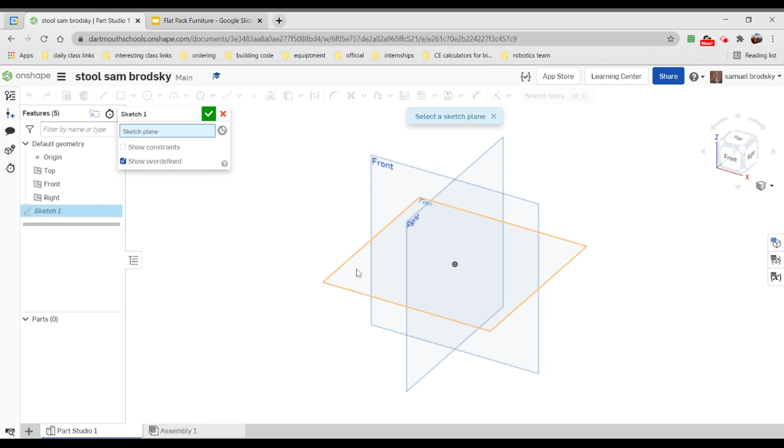Obviously, we'll always begin with a sketch. I'm going to do it on the top plane because I feel like it. I'll look at the top plane.

Now's the point where we need some dimensions, and we're going to have to switch over to look at our sketch to figure out exactly how we're going to make it. So maybe I'll start with this top piece, which is a 12-inch circle, and I'll later cut some 8-inch long slots into it to fit the stool legs. I could also have started with the stool legs, it doesn't really matter.

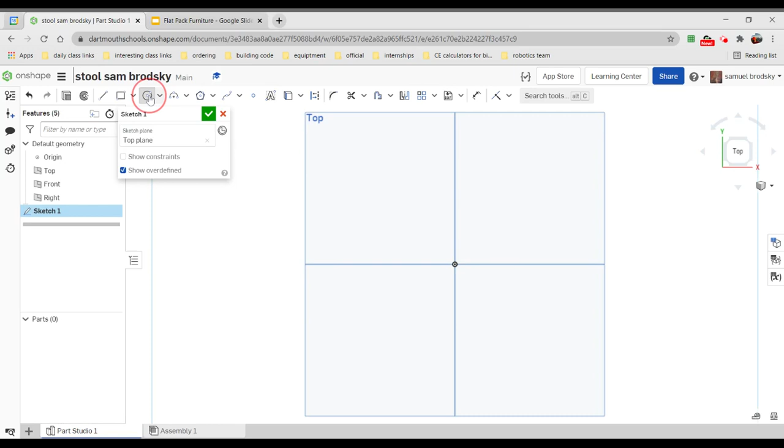I'll put a dimension in there. It's too big for my screen, so I have to zoom back in, or I can just click this and it will automatically zoom it. And that's my first sketch.

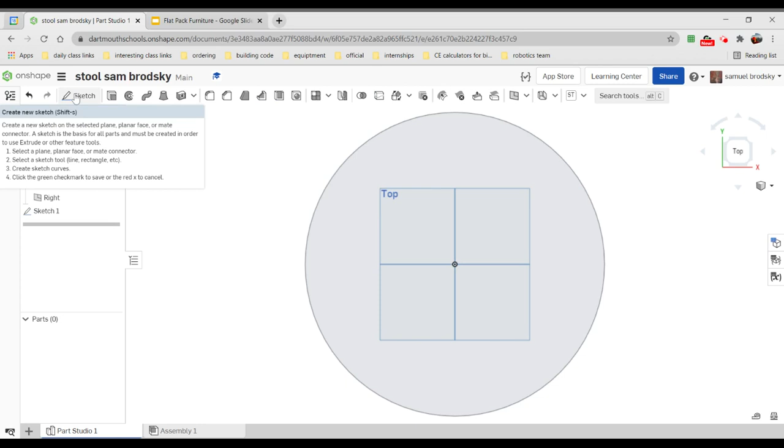You know what? I'm going to put my little cross-hatching in that sketch.

So I'm making this 3/4 of an inch wide, and I'm making it 8 inches long. I want to center it on here.

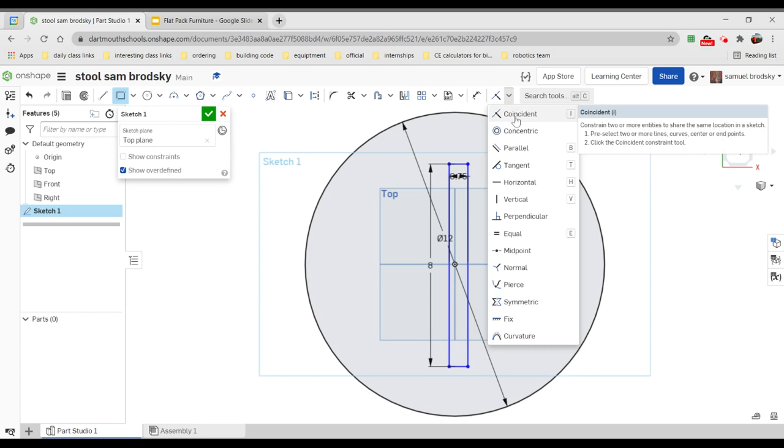So I might be able to do that with a constraint. But maybe not. So I'm going to do it with a dimension, because that's just as easy.

So that is half of 0.75. So I could actually do 0.75 over 2. Or I could go with 0.375.

And then I could dimension from here to here. Half of 8 is 4. Another one of those, going this way.

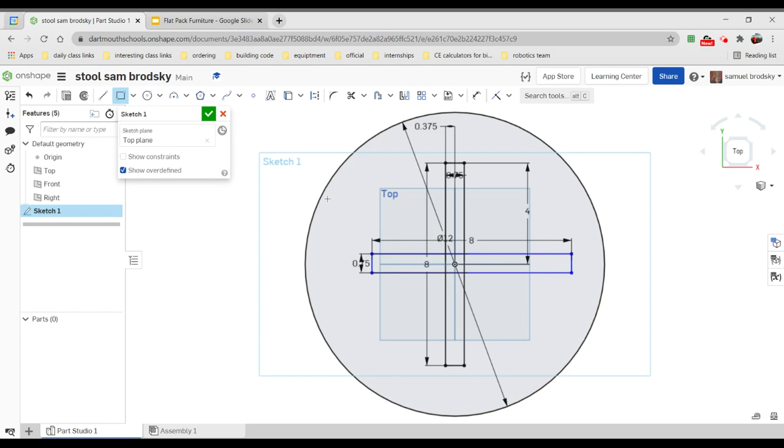I could have also used the linear pattern here, or sorry, circular pattern here, but I didn't, so no biggie. I don't think it would have been much faster with just 2 instances of the item.

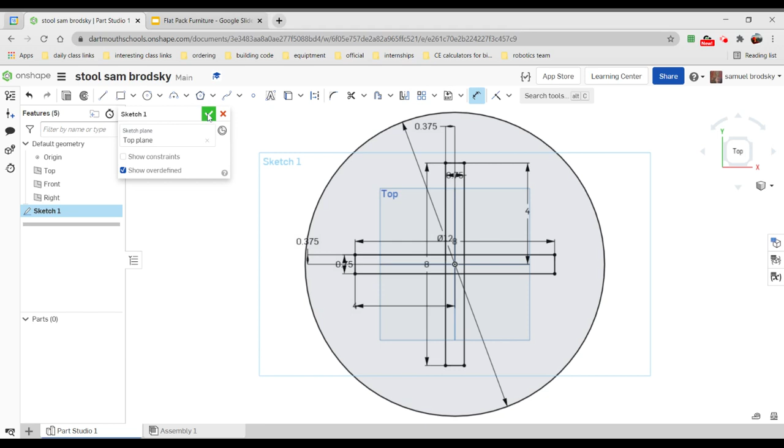Alright, and now that sketch is finished. I'm going to extrude everything.

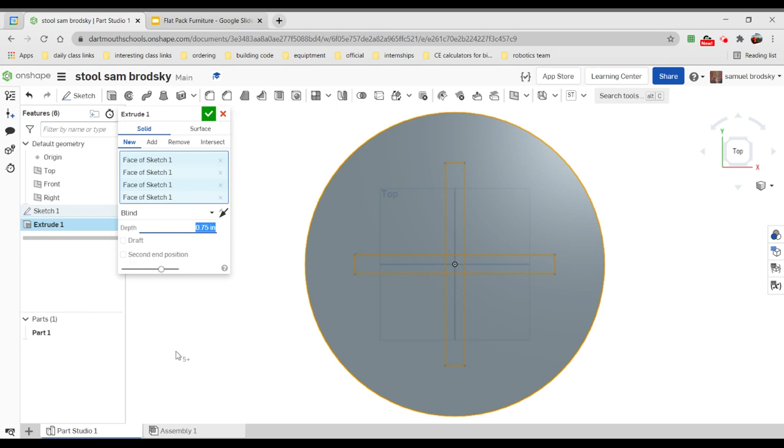To a distance of 0.75, because that's my wood. And now I have the top of my stool.

Now in order to cut that out, I'm going to actually make sketch 1 visible so I can see it again. And then I can use it again to extrude all of these pieces.

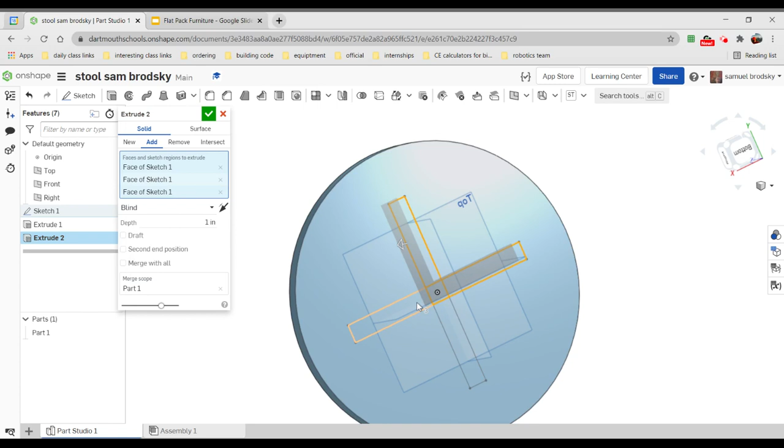Looks like it's going the wrong direction, so I'll change the direction. Oh no, wait, that is the right direction because I want to be on remove. And I'm only going to do 0.5 all the way through.

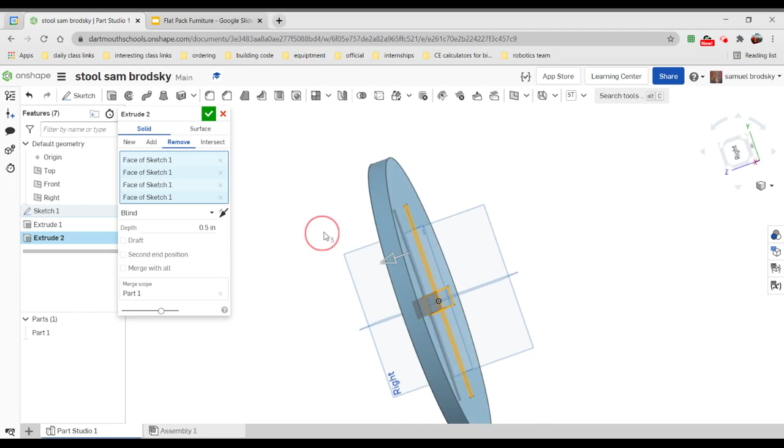So that looks about right. That's what I want. Alright, so there's my cut. And the top of my stool is complete.

Next step is going to be to build the legs. There's a couple different ways I could do that. I could build them in place, or I could build them separately. I'm going to build them separately.

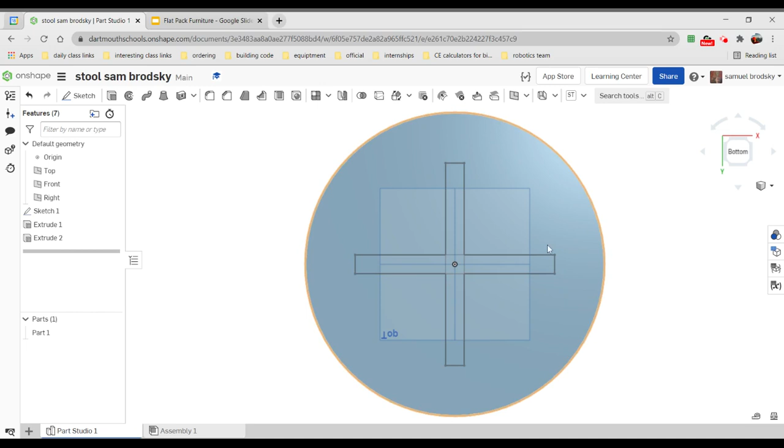So I'm going to start a new sketch on, let me flip this over, put it on the top.

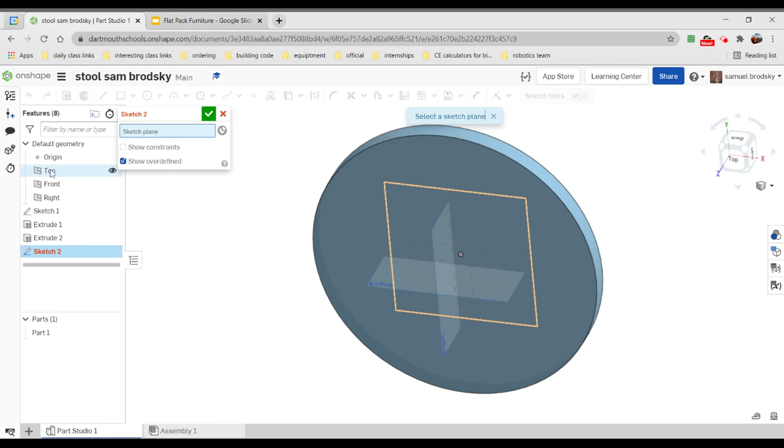So I've got a new sketch in the top plane, and I will drag this over so that I have a little space and zoom out. Again, it doesn't actually matter exactly where I put this because I'm going to assemble it later on.

Now looking back at my sketch, it's going to be 18 inches tall and it's going to be 12 inches wide. And there's a little slot at the top, 1/2 inch tall, 8 inches wide.

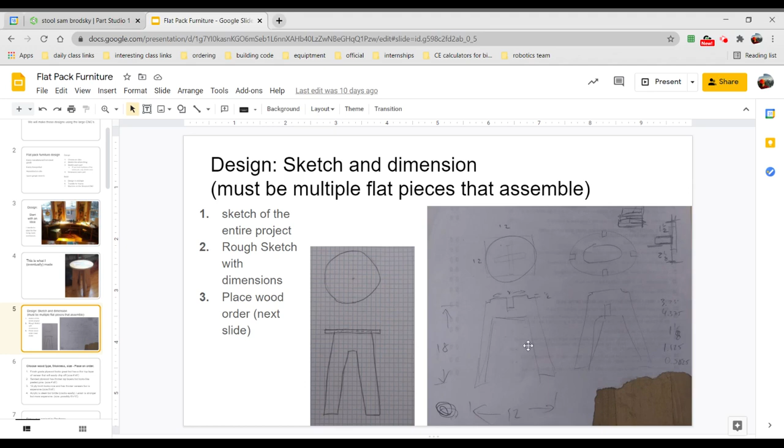I haven't put any dimensions on the internal shape, so I get to make those up as I go. Probably the easiest thing is going to be to start with a rectangle, which is going to be 12 inches wide and it's going to be 18 inches tall.

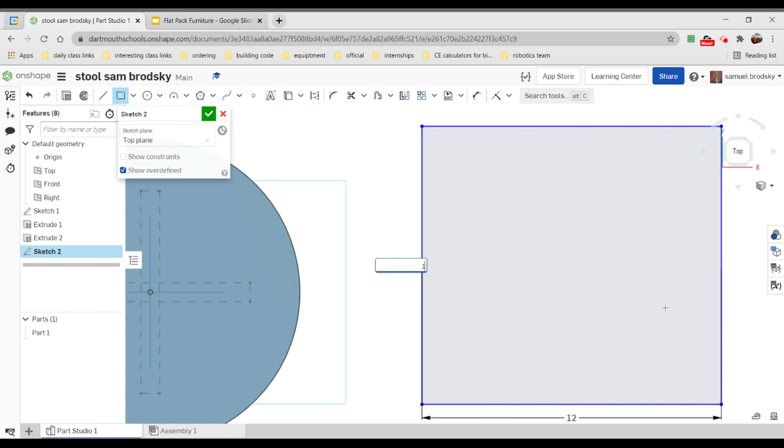I need to zoom out to see that. And now from this, I'm going to make all of the parts that I need to make. So I'm going to make a little slot that fits in the top.

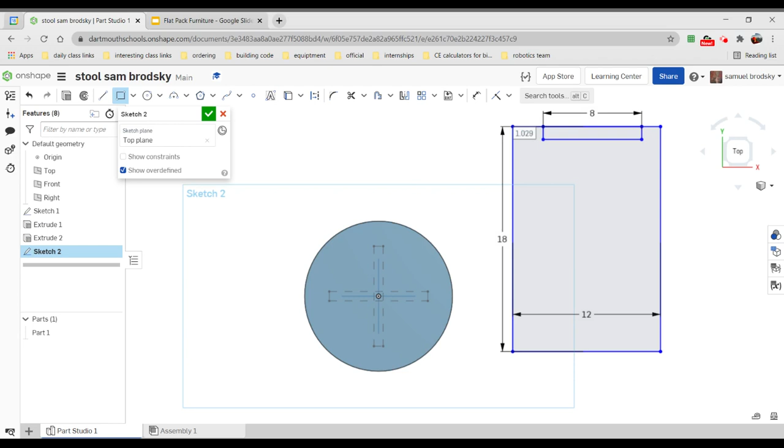And the dimensions of that are, so you can see it, I'll zoom out, 8 inches by 1/2 inch.

I have to make sure that that is centered on the 18 by 12, so I'm going to use a dimension tool here. Go from there to there. And that should be 2 inches.

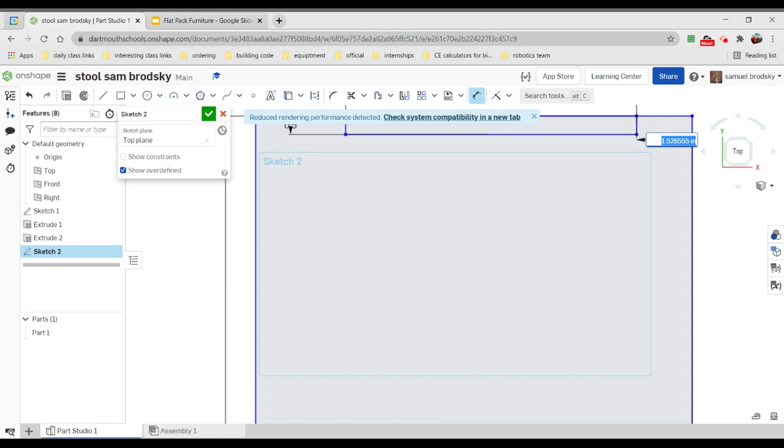I don't know how long I want it. I didn't really say in my thing, but maybe 1 inch long.

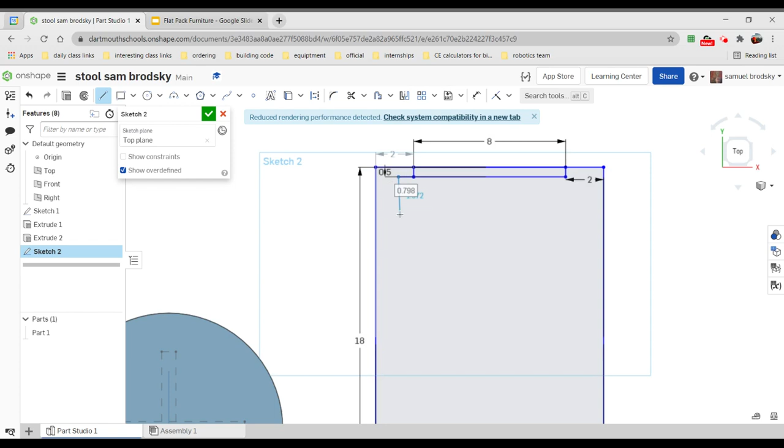And then I'll come down to this corner right here. And then I'm going to do the same on the other side.

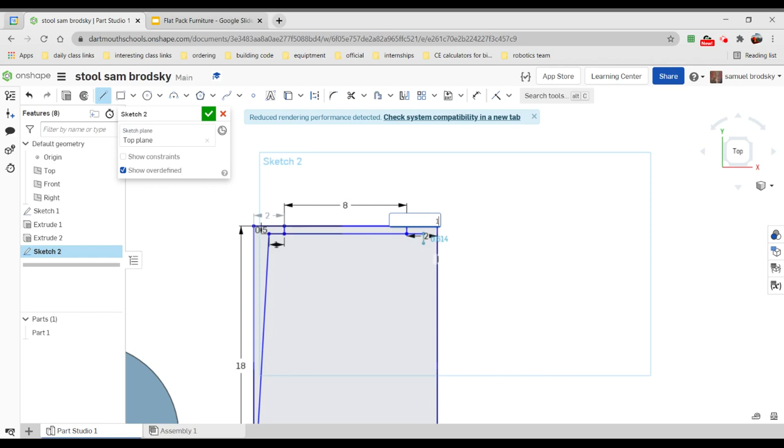Just say that, you go straight out, it kind of snaps to that. You got 1 inch. And then bring it down and snap it to here.

Very good. That's the overall exterior shape. I still need to make the interior shape.

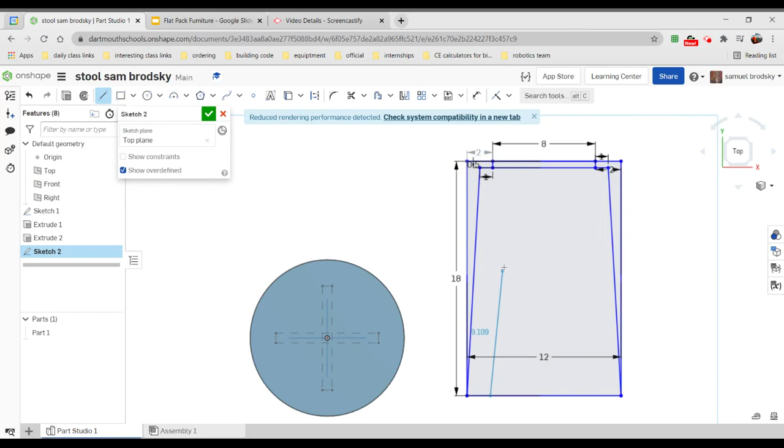Alright, so making the interior, I'm going to start at the bottom, come up, and we'll kind of snap to going perfectly across. Right there is snapping to perpendicular to the leg, but I don't want that.

I want it straight across, maybe to there, and then bring it down to here. And it doesn't matter if it's perfect here because we're going to later use some dimensions. And I can escape the line.

Now, use the dimension tool, make this guy 4 inches, make this 2 inches, make this 2 inches, and dimension this last piece here to be 10. Seems tall for the legs, like it's going to be wobbly, maybe 8. That looks kind of crappy.

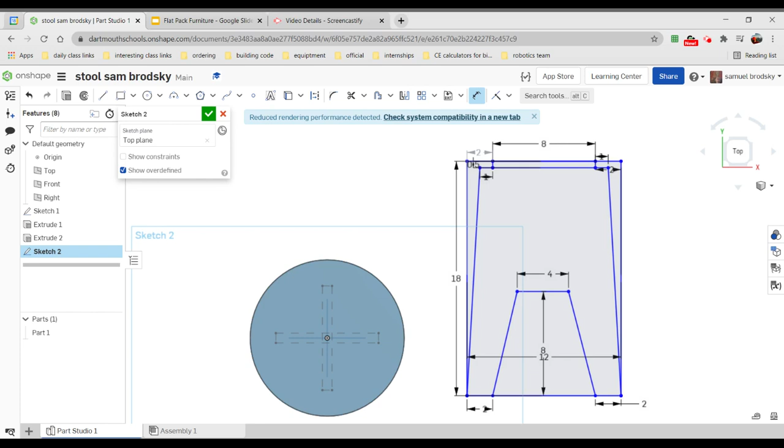So I'm going to bring it up. Maybe 10 is the right number.

Yeah, that'll be okay. I don't want it to look too chunky, but I don't want it to be too wiggly.

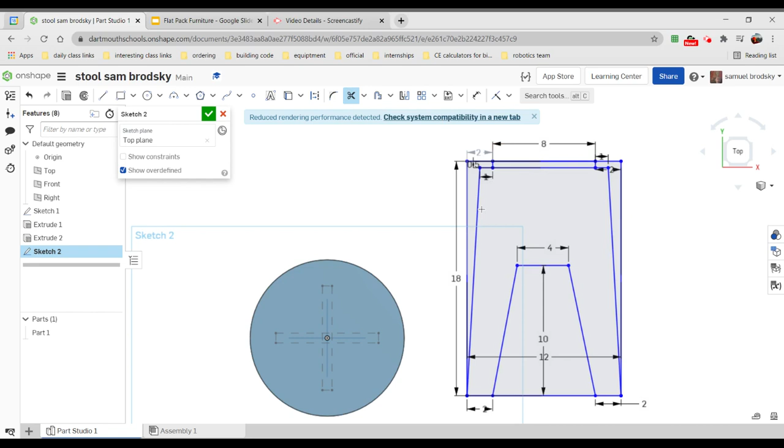Now I have to figure out how to clean this up. I'll use the trim tool and zoom in. Don't need that line, don't need this line, don't need this line, don't need that line, and I don't need that line.

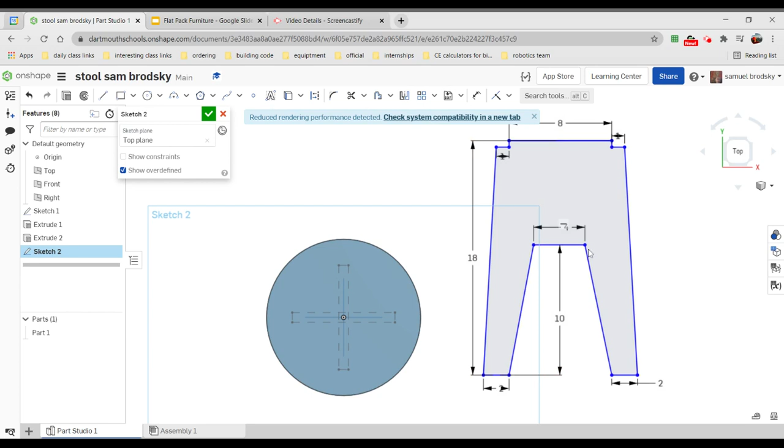Now this is one of the legs. Just because I can, I'll accept this sketch and I'll extrude it, using the same thickness of wood I chose at the beginning, 3/4 inch wood. And there we go, there's one of the legs.

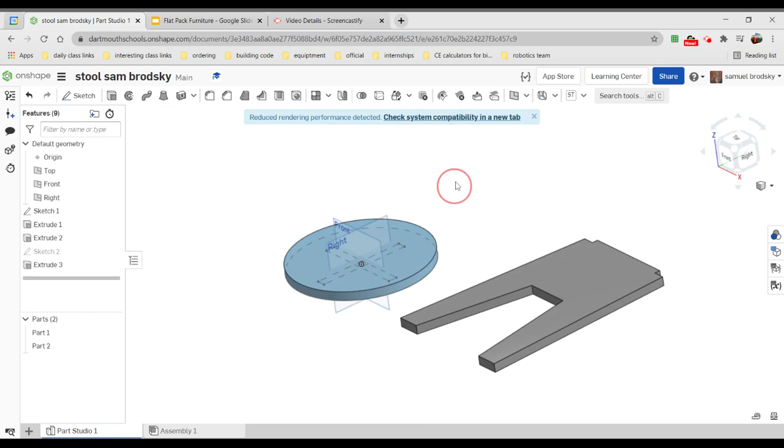It's going to slot in there. However, I need another leg. So in order to make my other leg, I'm going to go back into sketch 2 and copy this whole thing to make another one. It's all selected, I press Control C, I press Control V, and it pops it in.

In addition to these little arrows I can use to drag it around, I could also use this thing to rotate it, but I don't actually want to do that. I'm going to left click to accept it.

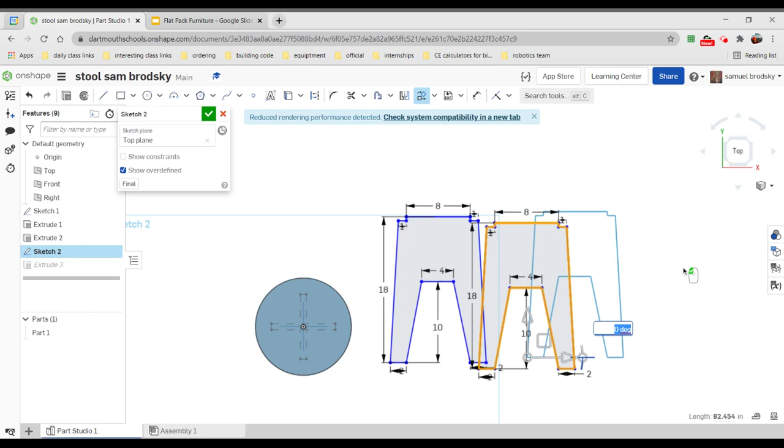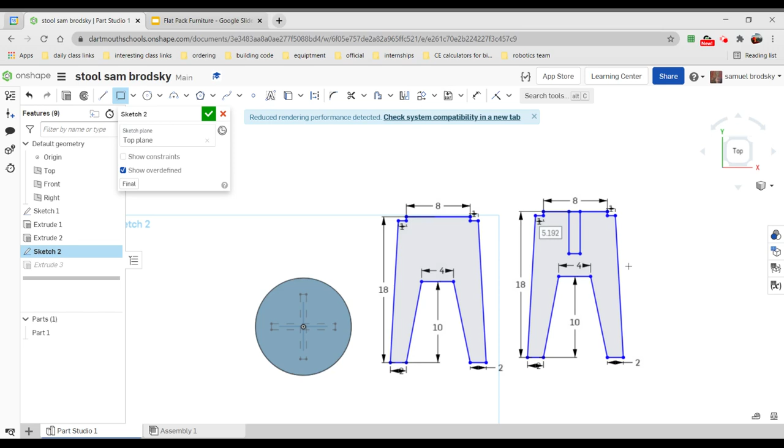Now I've got two legs, but one needs a slot at the top and one needs a slot at the bottom, otherwise they won't fit with each other. So I'm going to use my rectangle tool to make a slot at the top. It's 3/4 of an inch thick and 4 inches deep.

I want to make sure to dimension that to be exactly in the center, so it's the distance between there. The number I want is actually 8 inches minus 0.75 divided by 2. So 8 inches minus 0.75 is 7.25. I'll divide by 2, and it gives me exactly where the middle is, 3.625.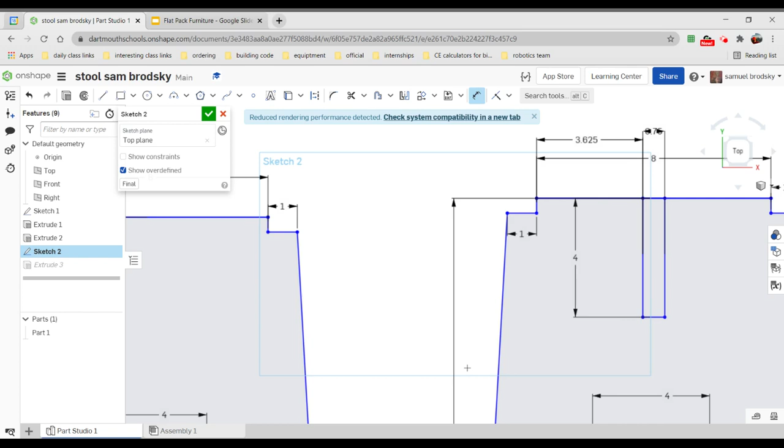Now I'm going to make the same thing over here, but opposite, so these can slot together. So the rectangle tool here, and it's going to be 0.75 by 4.

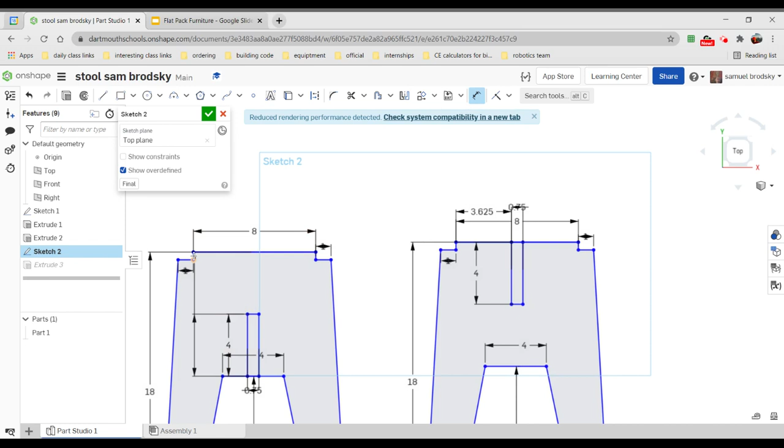The last thing is to put that dimension in from here to here. Not a square, a dimension. And just like over there, 3.625.

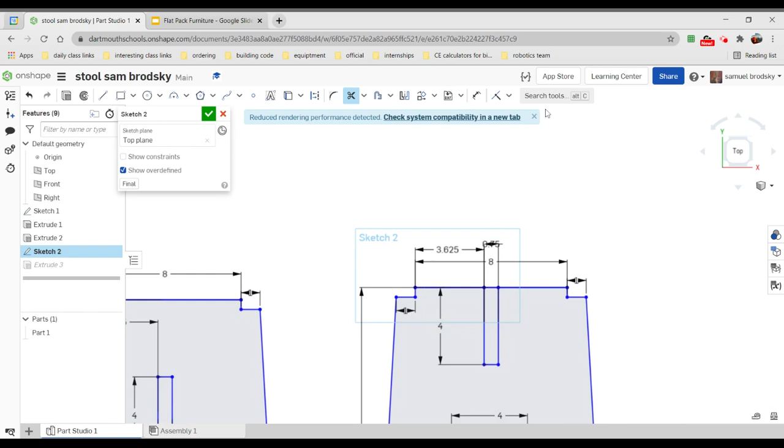There we go, fits in there perfectly. I'm going to use my trim tool again to trim out this little piece here that I don't need, and trim out that little piece too. So trim, there we go.

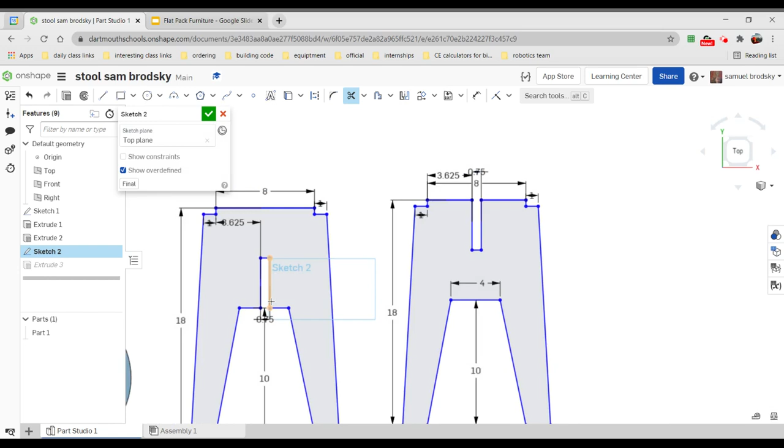I had two on top of each other, that's probably why. So again, I'm going to trim out that - it's going to require 2 clicks to trim both. And there we go.

Now I accept the sketch. Where'd it go? Well, it's part of sketch 2, there it is. But in order to make it part of extrude 3, I'll double click on extrude 3, add that to the extrusion, and there we go.

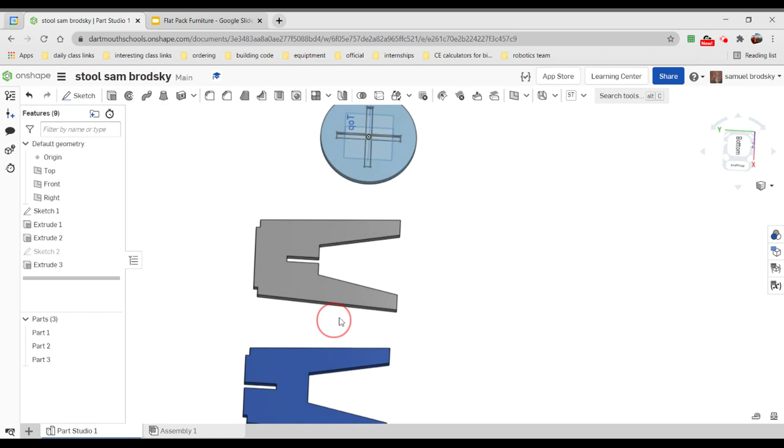We have 1, 2, 3 parts. They're all going to fit together perfectly - I'm sure of it. Not sure, but maybe they will.

All right, so this next step is to assemble them all together. So I will put in first, I'll insert the top, then I'll insert one leg, and then I'll insert another leg.

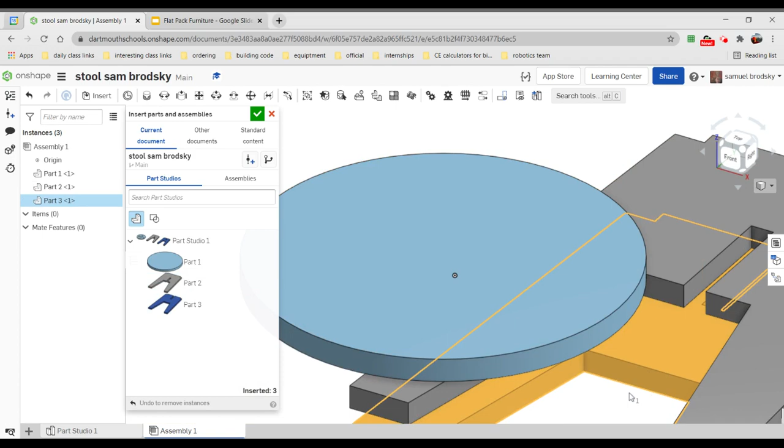Now I'm going to zoom out. I'm all good with that. Oops, I didn't choose to accept it, I chose to cancel it. Don't want to do that. Let's try that again.

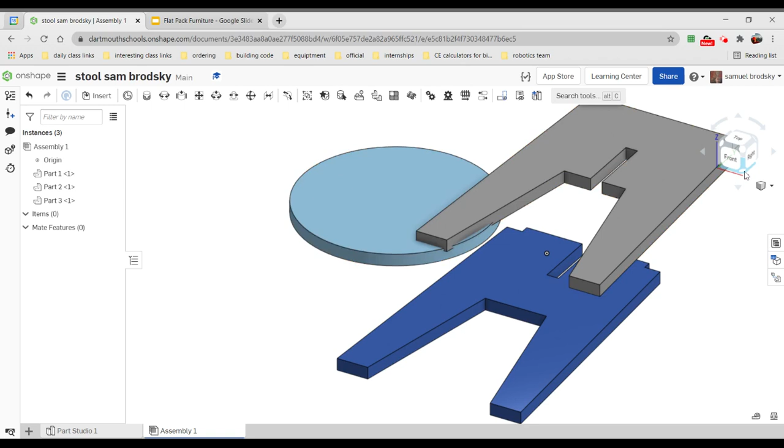Choose to accept it. Zoom out to where I see everything. All right, so I need to see the bottom here because these are going to slot in there. I'm going to use the fasten constraint. This part is kind of hard. I'm going to fasten this corner here, right there.

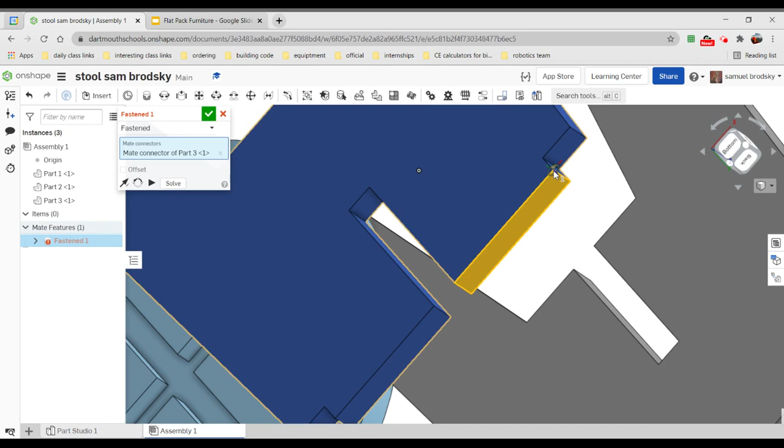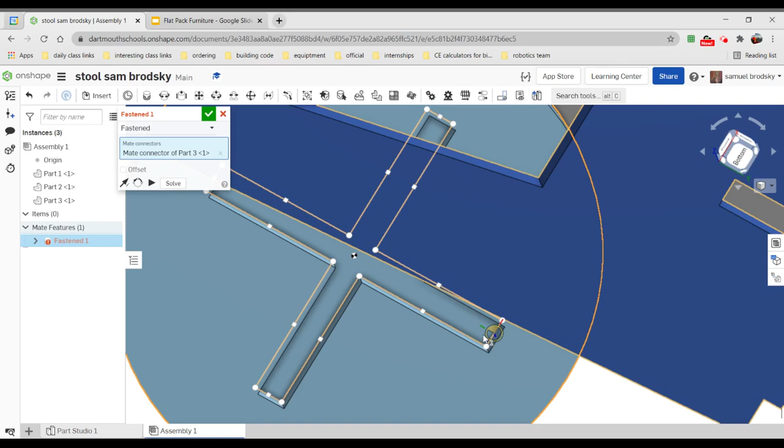So I have to first mouse over that so that blue line is pointing upward, so it's pointing away, and that's going to slot into this right here. I'm going to zoom into where I can get this. I want it right in that corner right there. So mouse over till that blue line is pointing up, and I'm going to stick those two together.

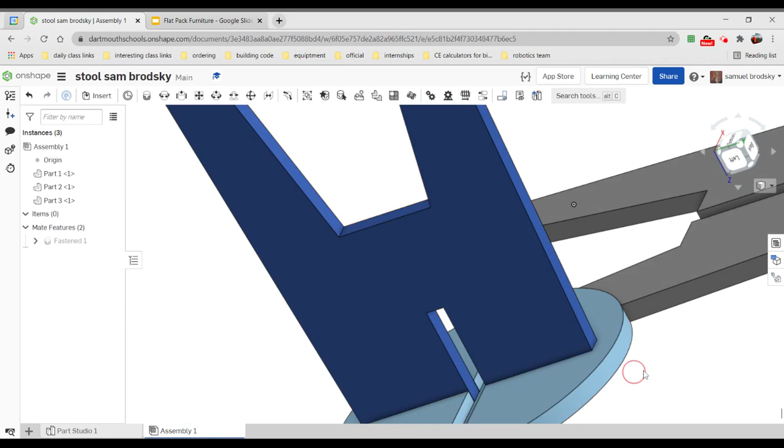Well, they didn't stick together exactly correctly, but I can fix that just by playing around with these things. All right, now it's on the correct side, and now it is rotated to fit. Perfect, look at that - fits right together like I knew what I was doing.

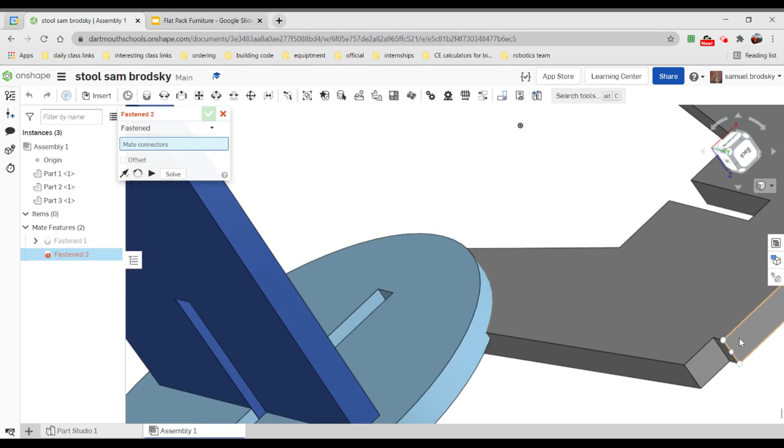Now the next one, I'm going to do the same way. So I'm going to fit this corner into that corner. Fastened constraint, mouse over it so I'm looking at that face. The blue line goes away from the face that I want to stick together, so the two blue lines are essentially going to face toward each other in this situation.

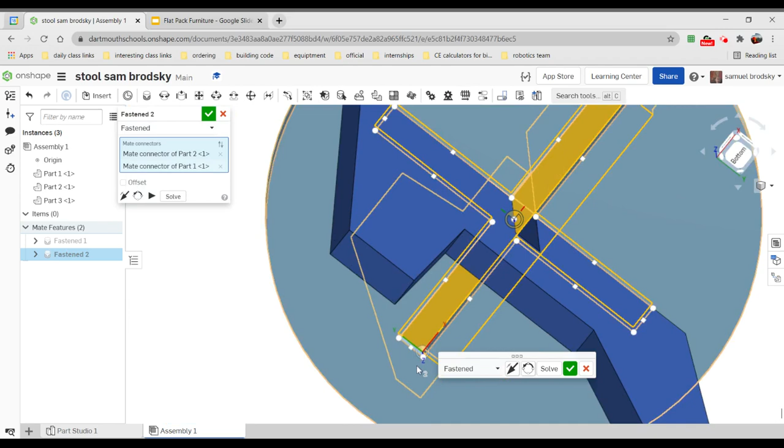I'll zoom in here - it's going to stick to this face here, blue line goes up. All right, same problem, it's on the wrong side and in the wrong orientation, so I'm going to flip it around. Oh man, it's like already perfect. That's amazing.

All right, here we go, there's my stool all locked together. Now the stool in the picture actually had a design on the top, and I can put a design in Onshape if I want to draw it by hand. But there's actually a way in VCarve to trace an image, so I'm probably just going to wait until I get into VCarve and trace the image there.